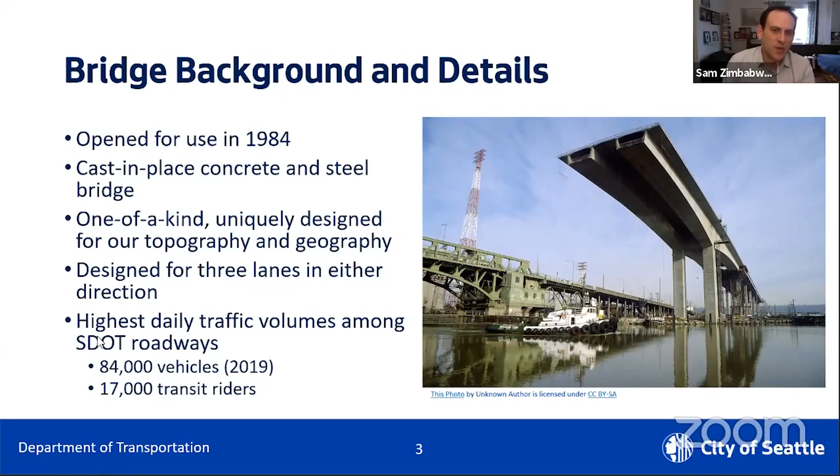Since March 23rd, when we made this difficult decision to close the bridge due to the rapid growth and cracking along the center span of the bridge, we did that, and we'll walk through exactly what led to that and some of the growth and cracks that happened very quickly. We had to make that decision very quickly to preserve life safety of people throughout the city, both traveling on top of the bridge, but also those underneath. Over our frequent inspections of the bridge, there had not been indications that this level of cracking was going on, and some of the acceleration really came on very, very quickly.

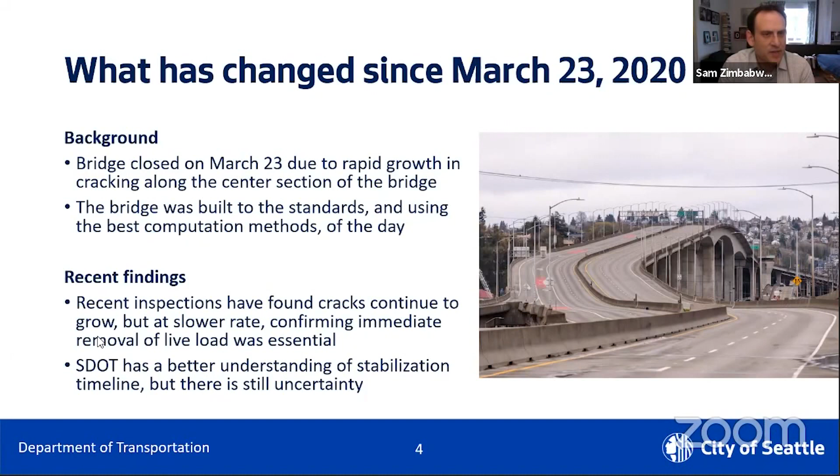Since we removed vehicular traffic from the bridge, we've still found that cracks continue to grow, but at a slower rate. That confirms our immediate removal of the vehicular load of the bridge was essential, but we are not yet out of the woods completely. We have a better understanding of the stabilization timeline, but there's still some uncertainty that I'll walk through.

I want to continue to reiterate that safety is our top priority and will guide us through this process going forward. We continue to inspect the bridge daily, but also make sure that the bridge is safe for our crews to work. Right now, we're installing intelligent monitoring equipment on the bridge that will alert us to changes in real time and help us understand the trajectory and how the bridge is continuing to evolve, so we can understand the potential cracking scenarios and adequately prepare contingency plans.

So we are right now developing emergency response plans with our emergency response partners, including the police department, Seattle Fire Department, and the Coast Guard, on what to do if we ever get to the point of imminent failure, so we can ensure public safety. I want to be very clear that right now, we do not think that the bridge is at imminent risk of failure since we've taken the vehicular live load off of the bridge, but we are not yet out of the woods, and we want to make sure that we are prepared for any eventuality here.

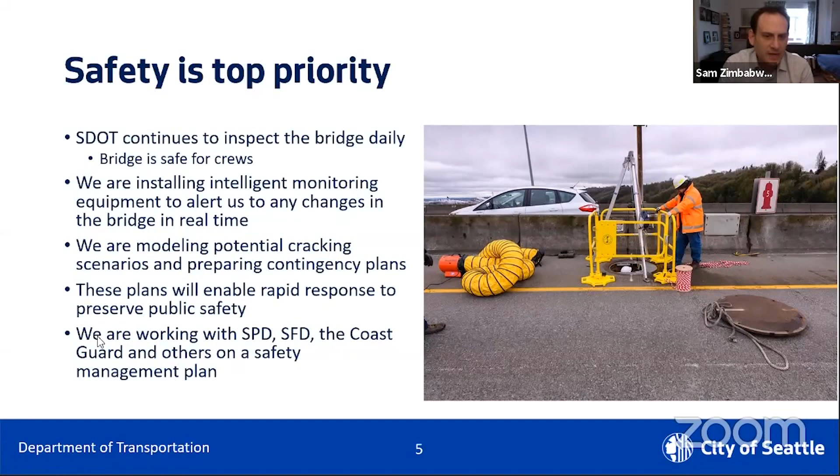We'll come back to all the things that the community can do overall here, but one of the key things that people can do is to sign up for Alert Seattle today.

And this is a good idea no matter if you're concerned about the West Seattle Bridge or just concerned about what's going on in the community overall. Signing up for Alert Seattle is a good idea in general.

And we'll come back to this at the very end about all the things that people can do to make sure that they stay informed about the long-term future of the bridge and any need for emergency response.

So as we start talking about the future of the bridge, I want to be clear that there's still a lot of uncertainty around how we will return vehicular traffic and return it to being a critical transportation asset. We don't yet know whether repair of the bridge is feasible from a technical or financial perspective. But if repair is feasible, we think it can extend the life and provide up to at least another 10 years of additional use. But this process will take some time, and we don't anticipate traffic returning to the bridge during 2020 or 2021.

Throughout our work on the bridge, we're committed to clear communication and transparency with the community. And this town hall tonight is really just the beginning of that. We expect that we'll continue to provide updates and information as soon as we have it.

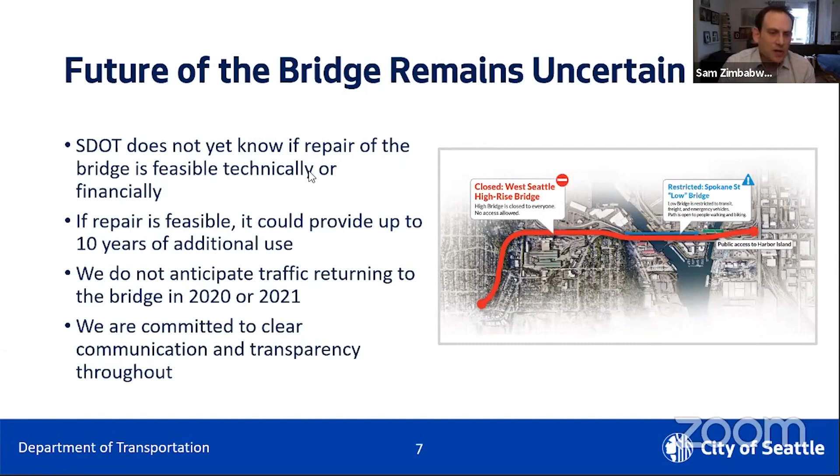I want to talk through a little bit of the history that got us here and then where that takes us in the future, and what took the community by surprise and honestly came up on SDOT very quickly as well, and how we went from safe to failing in just days.

We've inspected the West Seattle Bridge annually since 2013, that's twice as frequently as required. Since March 23rd, we've released all of the inspection reports that go back to 2013. During those inspection reports, there wasn't an indication that the bridge was unsafe, or that normal traffic would be affected by what we were seeing.

Concrete bridges of this type crack. That's a normal aspect of what they do as a structure. It's really the type and the scale and the trajectory of those cracks and where they are that gives us pause. And it was not until very, very recently that we had any indication there would be an impact to normal use of the bridge.

So in mid 2019, we started a process of detailed modeling of the bridge structure called a live load rating. At the same time, we also did some preventative maintenance to inject the cracks we had seen growing very slowly since 2013 with an epoxy to protect the steel at the core of the bridge from the elements. Working through 2019 and continuing on-site inspections with our engineering consultants, we continued to monitor the bridge.

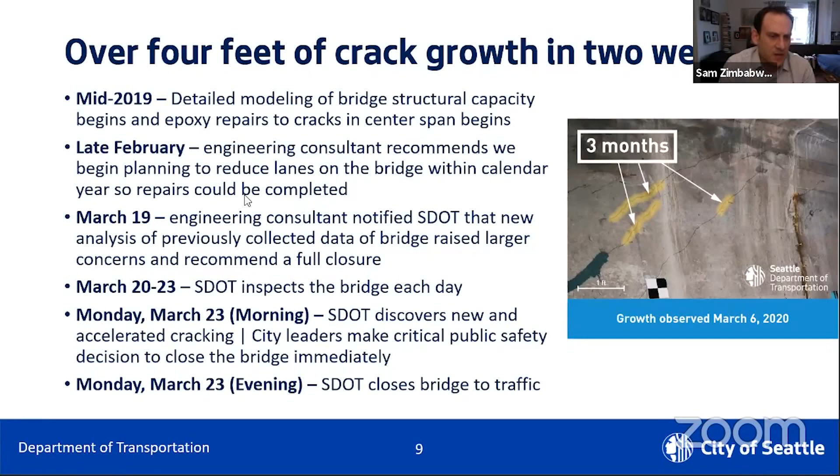March 19th, our consultants notified us that the cracks had gotten a lot bigger and raised very big concerns about the stability of the structure. We went back and inspected each day over the weekend of March 20th to Monday March 23rd. We saw those cracks continue to grow very quickly and made the recommendation to close the bridge, which we did that evening, acting very quickly.

This picture shows a little bit of where we had seen that growth in those last couple of weeks before we closed the bridge, on one of the walls, and we have about 8 different walls where we've seen this type of cracking. On one wall alone, we found that 8 of those cracks had grown in total more than 12 feet, and the longest crack had suddenly grown by more than 4.5 feet. We saw those cracks creeping up the wall towards the deck of the bridge, towards the top of those girder walls.

That was very concerning about the rate of growth with the live load of traffic on the bridge. We've said it in other venues, but the weight of the bridge itself is about 80% of the load that it carries. And so we had to do very quickly whatever we could to remove as much load as possible.

The way to do that was to remove vehicular traffic just to stabilize the bridge. Since we've removed the live load from the bridge, we've seen those cracks continue to grow a little bit, but at a slower rate. We're very closely watching that, making sure we don't get towards failure. We think this accelerated growth in the last few weeks before we closed the bridge was not a maintenance issue, but something else we're still trying to understand that led to this rapid acceleration of cracks.

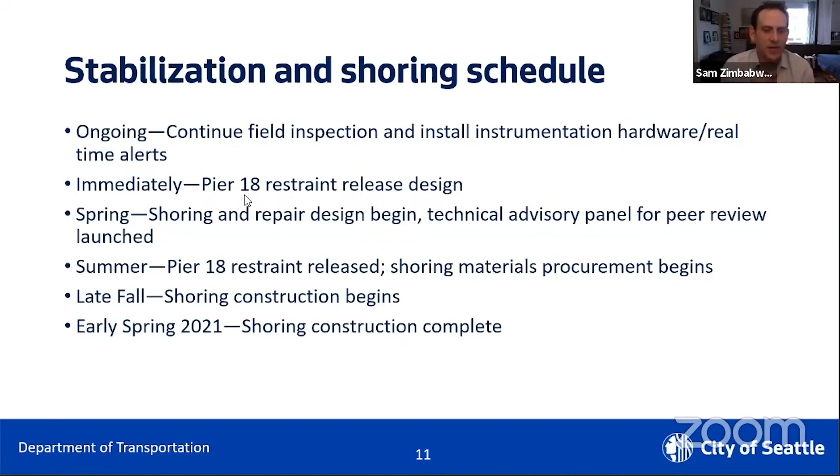We think of these things in phases. The first phase is to slow or halt the bridge deterioration. That started when we closed the bridge, removed vehicular live load, and began working to stabilize the bridge itself. No matter what happens long-term, this stabilization is absolutely essential to maintain public safety in the community.

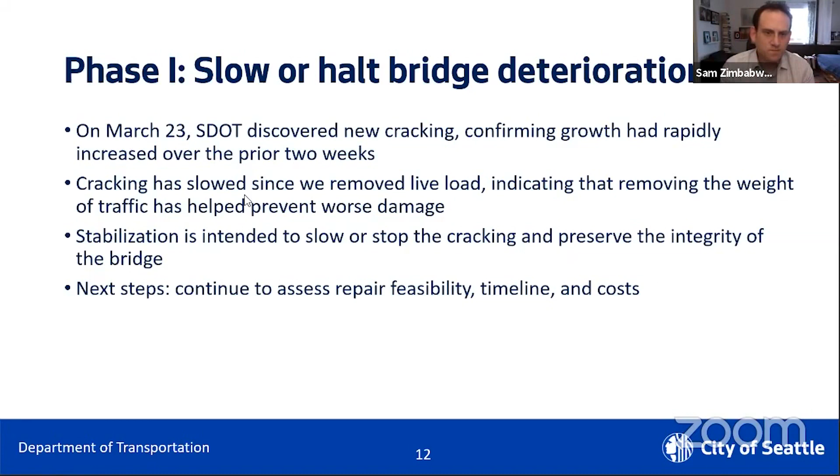One really key piece of that is Pier 18 and a lateral bearing. A bearing is something in a bridge that sits between the roadway and the support piers and columns that hold it up. This allows the bridge to move and absorb forces in response to traffic, and to expansion and contraction of the concrete and materials based on temperature changes and normal changes in concrete.

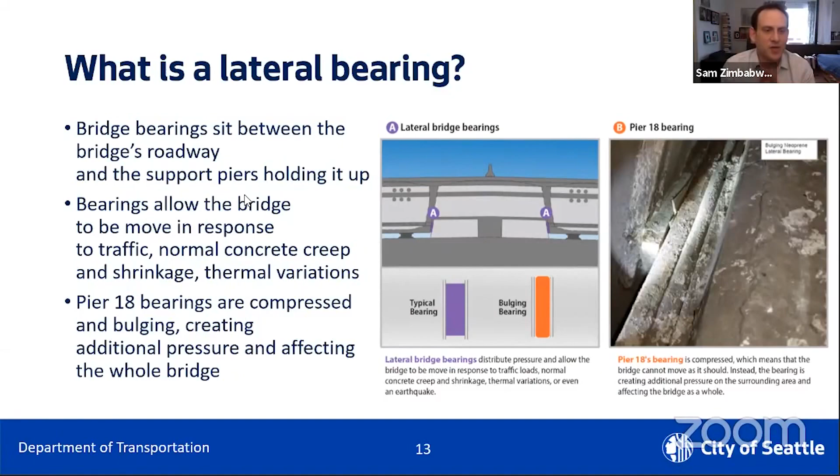We have a bearing that transfers lateral load along the bridge that is compressed and bulging. That seems to be adding additional pressure and stress affecting the whole bridge. We've got a picture on this slide that shows, it's a little hard to see, but there's a bit of neoprene between two pieces of steel that is bulging, and so is not absorbing the pressures as it's supposed to, creating additional stress on the whole bridge.

Pier 18 is on the eastern side of the bridge. The West Seattle High Bridge, the critical piece of the structure, has 4 sets of columns that support 3 different spans, which go from west to east. Pier 15 is on the west side, just east of West Marginal Way. The center span between Pier 16 and 17 crosses the Duwamish Waterway, and Pier 17 to 18 is over the eastern side on Harbor Island.

So the first step is to unlock the bearing, fixing this bearing issue on Pier 18, which will remove some of the stress. We're in the process right now of procuring a contractor to perform these immediate repairs.

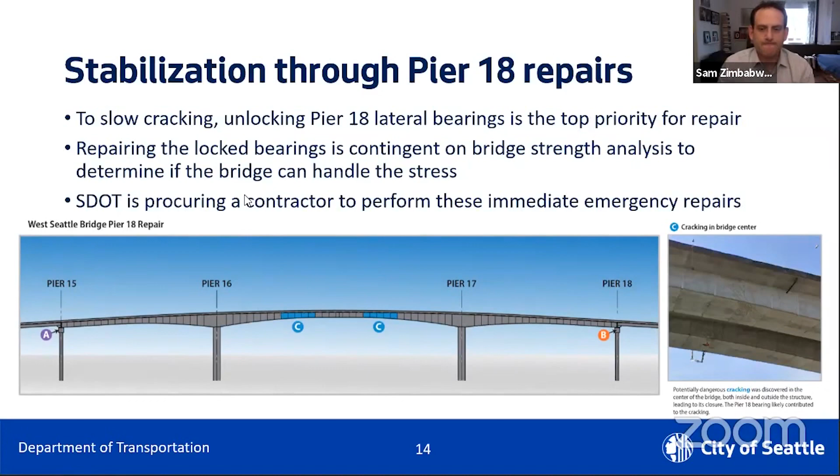The next stage, once we've unlocked this bearing, is shoring the bridge to continue to stabilize it. This means adding some temporary structure to the bridge to preserve its integrity and enable us to do more extensive repairs. We need to make sure the bridge is stable enough to enable that additional repair work.

We think that will start later this year, and we'll have some long lead time in terms of the materials and the methods of how to stabilize the bridge fully and make sure that we can do that safely.

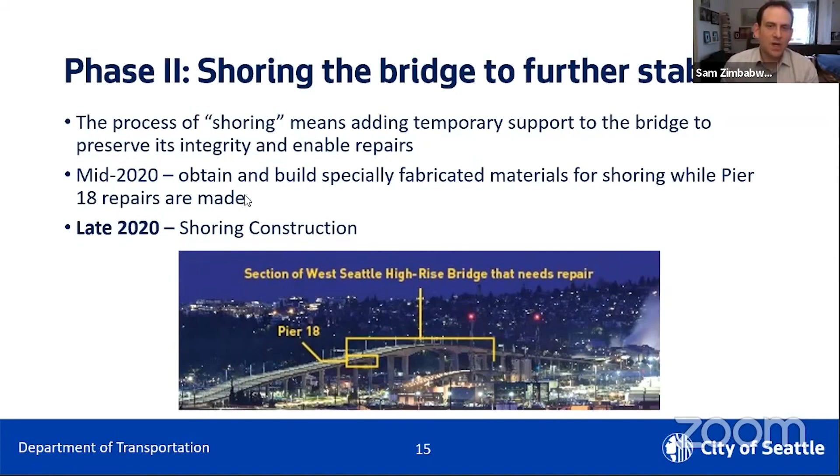The next stage after that is still a little bit uncertain, but after shoring we would enter a period of bridge repair. There are some key elements of uncertainty I want to discuss, which leads to some of where we are in terms of a timeline.

Right now, we don't know whether we can stabilize the bridge before further deterioration makes that infeasible. We also don't know exactly how we will construct that shoring and repair, and whether there are additional permitting requirements, because the Duwamish is a critical navigation channel as well.

And if we have any impacts to that, we'll have to get additional permitting to be able to do both shoring and repair. We don't know exactly what types of equipment or materials we'll need to fabricate, both for that shoring and repair. This is work that we are in the middle of right now to help answer these questions.

All of these will feed into our understanding of whether repair is feasible from a technical and financial perspective. But we're still at the very early stages of this, still at 0% design. Each step as we go along this process will help us understand what is doable and what is feasible, how we will work on this.

We're also starting that process of understanding what replacement would look like, and whether and how fast replacement could happen, how it would be built, and what the potential opportunities and challenges would be associated with a replacement at the same time.

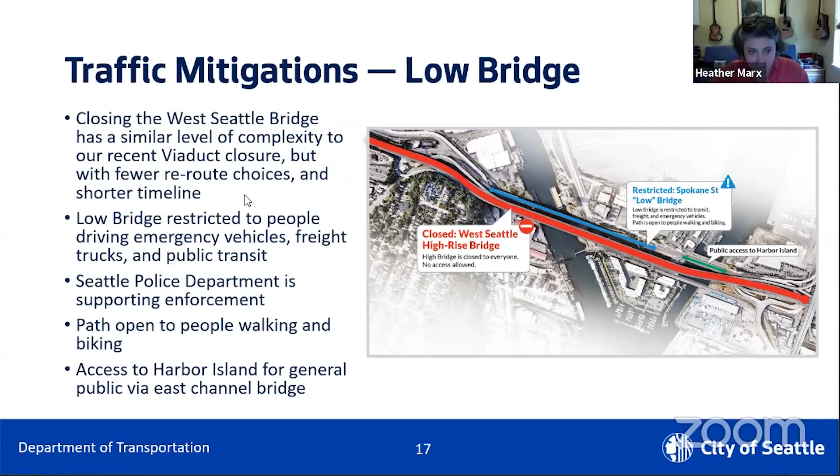We've identified some detour routes and alternative routes. People who live in West Seattle and travel back and forth to South Park and Georgetown know their own secret routes, and we certainly encourage people to continue using those. One common one, though, is Highland Park Way, so we've installed a traffic signal at the corner of Highland Park Way and Holden. We've also improved, and are continuing to improve, the detour route signage leading to the First Avenue South Bridge.

Signals at the 5-way intersection by the Chelan Cafe, near the Low Bridge, have been interconnected to the citywide system so we can change the signal timing there in real time to respond to traffic conditions on the ground.

We're going to repave this intersection this weekend, so that's going to be a lot smoother. As time goes on, we'll add additional improvements to make that intersection work better. We'll also be restriping, adding signage, and smoothing alternative routes. We've identified a handful of medium-term measures, and we're working on long-term measures that may help smooth the way for traffic leaving and coming into West Seattle.

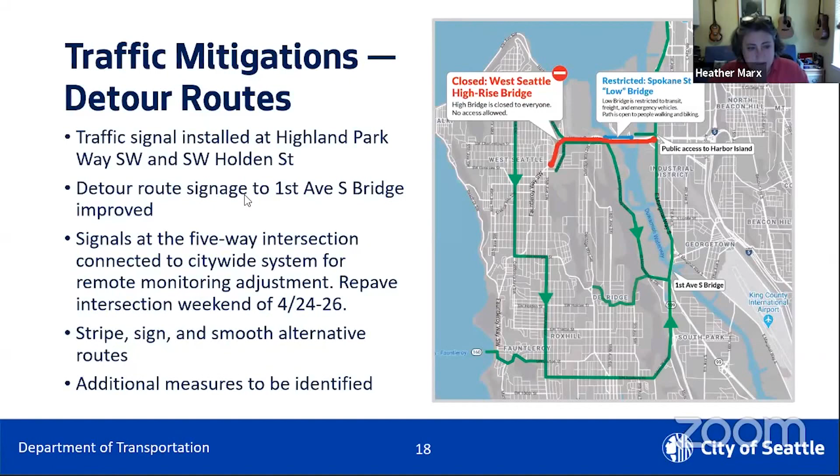We're working closely with transit because transit always has to be the best way to get places here in the city. SDOT and Metro are working closely to keep buses moving in and out of West Seattle as quickly as possible. As I mentioned before, people driving buses are among the folks who are allowed to use the Low Bridge.

Metro, as many of you may know, has reduced service in response to the public health crisis, and they've done that several times. We're working closely with them to plan the service they'll add back when restrictions are lifted. I also want to note that West Seattle buses on the Low Bridge are subject to bridge openings of that lower level bridge. It's about 700 buses a day, normally 900 in a pre and post COVID world.

We're also working together, speaking almost every day on data sharing and traffic monitoring, and that work is going to help inform improvements we may make along those routes to help reliability.

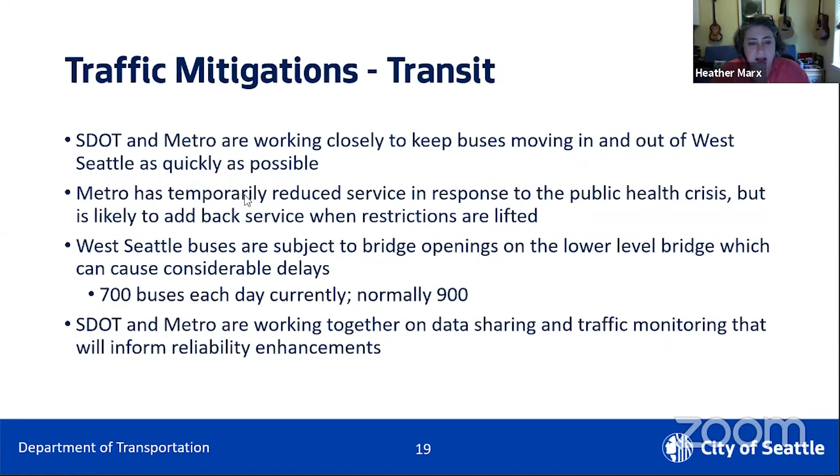Part of the work that we're doing is represented by this meeting right now. We want to work with the West Seattle community, the Georgetown community, the South Park community, surrounding neighborhoods, and businesses to help keep people informed, provide resources, and answer questions.

We have several ways to get informed. We can share email updates with subscribers, so please visit SDOT's website and sign yourself up there. We also post blogs, maps, and graphics on our website nearly every day, and that's a good source of information. Of course, we continue to work with the media to share updates, so please do pay attention there.

We're working with the Department of Neighborhoods and the Office of Economic Development so that we can reach the broader community throughout Seattle and the region, including the freight and maritime communities.

Whenever there's a crisis, I like to know what I can do right now to make things a little bit better. The first thing you can do right now is go to seattle.gov/transportation/West Seattle Bridge and click subscribe now. There's a button and you'll be able to get email updates about the bridge.

You can also browse all the reroute maps and FAQs. If you have questions, please send an email to 684road@seattle.gov, or call 206-684-ROAD.

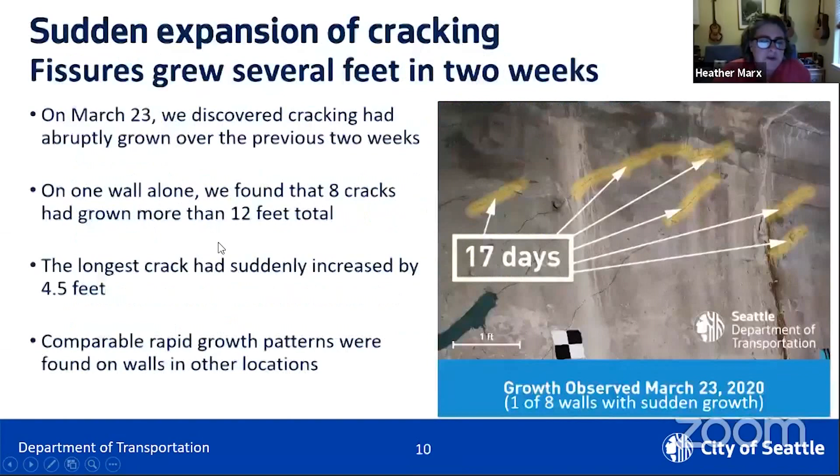So we did have something a little stronger during the squeeze. That was a 3-week period. It was a little bit of a different situation. Also, the requests to open that bridge are really controlled by tides. And I want to note for everybody's benefit that traffic that goes in and out of the Duwamish isn't primarily pleasure boats. There's a lot of traffic that takes critical supplies to Alaska and things that folks in Alaska need for their normal, everyday lives. And so I understand the inconvenience.

We have asked the Coast Guard for more stringent closure, but we need to do some significant outreach to the marine community in the area. It's called a deviation request. And so we need to do that outreach with the maritime community. Candidly, right now, we're working with the maritime community primarily on emergency response plans. And so that traffic request is next in the queue.

Got it. Okay. I'm going to jump back to another question that was echoed by a few different people. Dan asked this: are you going to set up a bike to car parking area on the far side of the lower bridge for West Seattle residents? Sort of this park and ride concept. A few other people have asked about this too, setting up some sort of situation like that. Can someone jump on that question, please?